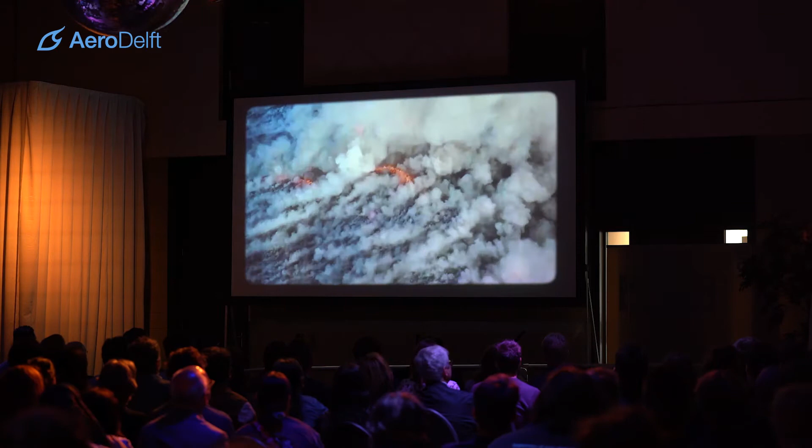Yet it also contributes to a serious problem. We're facing a man-made disaster of global scale. There is a solution.

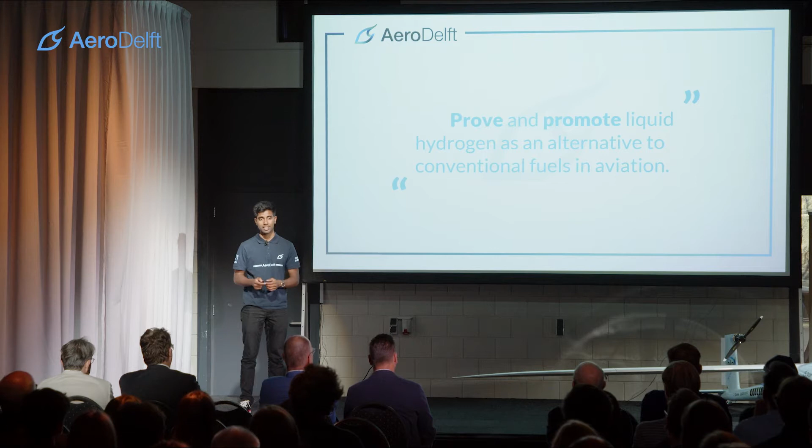We gathered here tonight to celebrate some of the biggest achievements AeroDelft has ever seen. We are closer than ever in achieving our mission to prove and promote that liquid hydrogen is an alternative to conventional fuels in aviation.

This also ties in the program of tonight, where first our Chief of Partnerships will tell you about the operation side of AeroDelft, showing how far we've come with the 'promote' part of our mission. This is followed by presentations by our engineering chiefs and technical managers who will walk you through the engineering work done this year, showing how far we've come with the 'prove' part of the mission.

But first, just like the video, let's take a step back to the very origins of AeroDelft to see what led to the inception of AeroDelft, Project Phoenix, and to where we are today.

As long as mankind existed, we have always dreamt of taking off to the skies. About 120 years ago, this dream finally became a reality. The Wright brothers achieved the first ever manned motorized flight. Let this sink in for a bit.

By pushing the boundaries of what's possible and with a true feat of engineering, we humans gained the ability to fly. This truly revolutionized transport the way we knew it.

However, as many of you also might know, there's also a darker side to this: climate change. This is an issue we cannot understate. We all know it is here, we all know it is a problem, and we all know who caused it. Us, people.

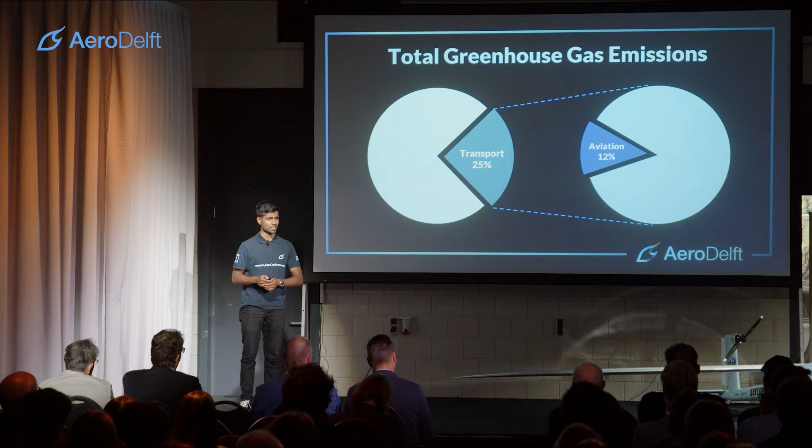Of these greenhouse gas emissions, about 25% comes from the transport sector. Of this 25%, 12% comes from aviation. I already hear you thinking, oh, that's not that much, right? Well, if you look at our next slide, you see that since 1990, the carbon footprint of the aviation industry more than doubled.

This is partly because the aviation industry almost experienced no carbon restrictions, while other sectors often had to adapt. Today, driving by car in a carbon-neutral way is a reality, while aviation seems to be lagging behind.

The aviation industry, evidently, is the quickest growing sector with a carbon footprint there is. On top of that, by 2050, the demand for aviation is expected to triple. Clearly, something has to change.

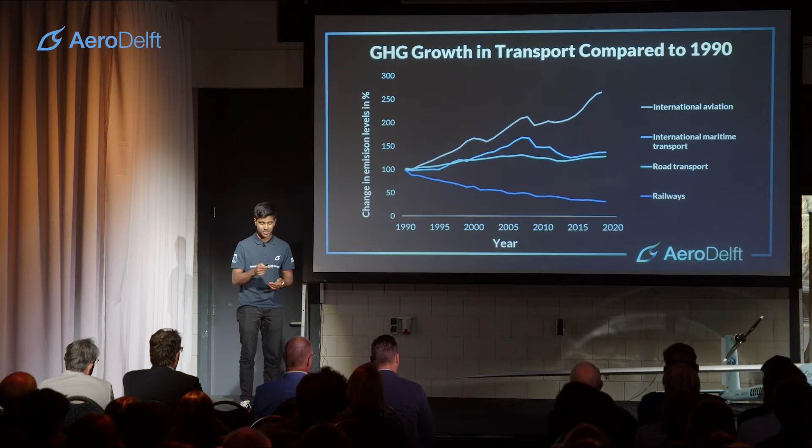Incremental evolution in the form of efficiency savings is not enough. We have to radically rethink the way we propel our aircraft. This is what led to the foundation of AeroDelft and soon after Project Phoenix, the name marking the rebirth of the aviation industry.

It was a team of 2018 who first set up this project and its mission and vision. They were also the first who focused on gliders and liquid hydrogen.

I also hear you thinking, but why hydrogen? Well, compared to kerosene, the use of hydrogen does not lead to an increase in CO2. The only byproduct is water.

Also, when we make this liquid, we can also store it in a much smaller and compact way. This makes it one of the most promising alternatives to decarbonize aviation. With this new focus on liquid hydrogen, the 2018 team really got us off the ground.

But as many of you also know, in this academic year, 19-20, was also the year the COVID-19 pandemic struck. Despite the countless challenges this brought, like working online or not even having a workshop, this team pushed through, even throughout the summer holidays, in a shed in Belgium to keep building this aircraft.

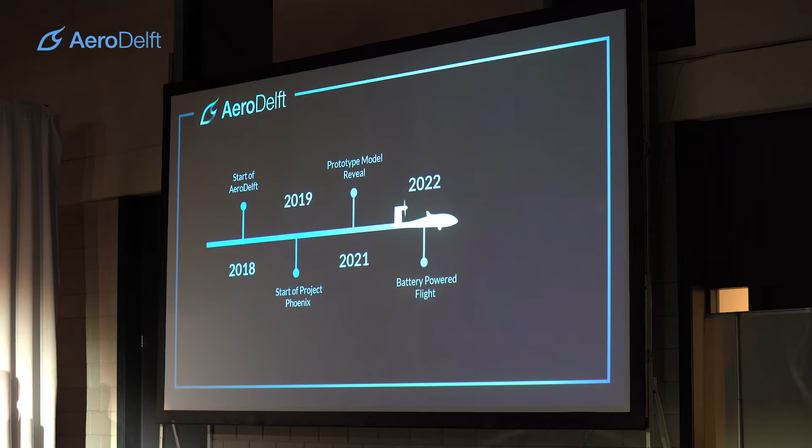AeroDelft started in 2018, and Project Phoenix started in 2019. In just 2 short years, we had our first big milestone: we managed to reveal the structure of our aircraft to the outside world. This year, we have focused on bringing the aircraft out of its construction phase and into its testing phase. In the coming years, we plan to intensify our focus on developing the hydrogen technologies that we aim to do at AeroDelft.

Our goals are reflected in the way the prototype team is structured. We have a testing team focused on building and operating the aircraft, and we have a propulsion team focused on building, designing, and testing our propulsion system so it's ready to be integrated into the aircraft and validated in the air.

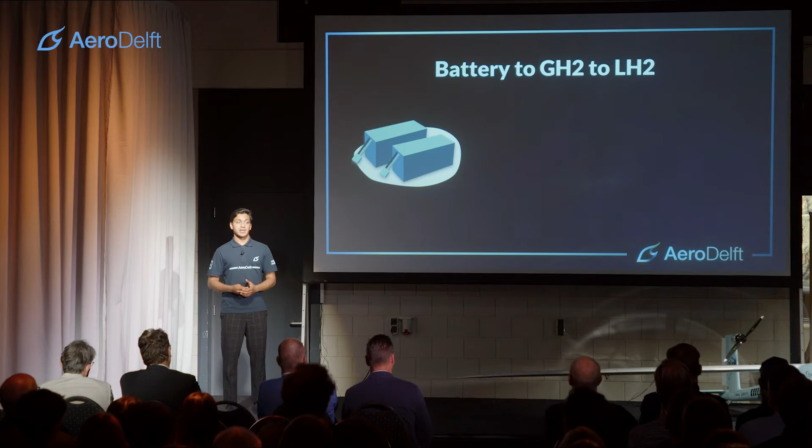However big our ambition is to decarbonize the aviation industry, we have to start small and simple. That is why the first step in the process is to fly our aircraft on battery power, to validate that the work done by the years before us has resulted in a flyable drone.

After this, we can start increasing the complexity slightly and integrating our gaseous hydrogen systems. This includes our tank, a number of pressure controllers, and a fuel cell. Then we can take the ultimate step and fulfill the goal of Project Phoenix prototype, to fly on liquid hydrogen. This step, once again, increases the complexity even further, including challenges such as cryogenic storage, temperature control and pressure control, and conditioning hydrogen to be used in an aircraft.

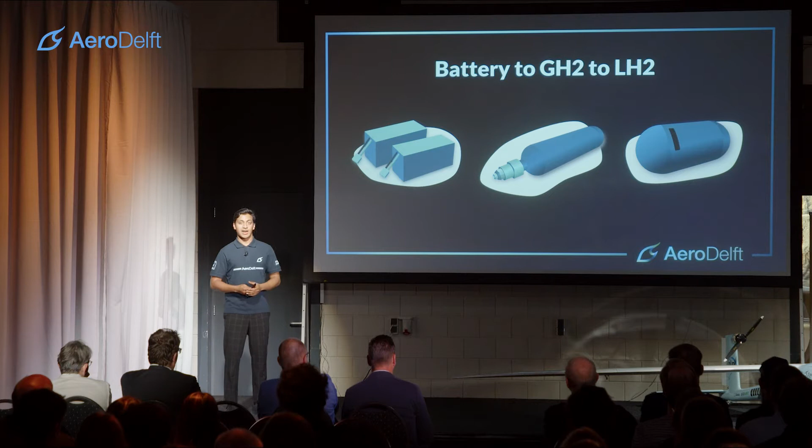So where did we start this year? Well, our first task was actually rather mundane: setting up our workshop. While doing this, we moved countless testing rigs, materials, and items, and we didn't really know what much of it was.

This is an essential part of a student team working on a multi-year project. Every year at the start, there is a very steep learning curve in which the new team understands all the work that has been done by the past team. Without transfer of knowledge, a multi-year project like AeroDelft would not be able to progress.

So, to introduce the aircraft: it is a 1:3 scale model of an E-Genius glider. It has a motor on the tail, and it's designed to be a glider to make the most of the precious hydrogen that we take with us on board. To give you an idea of its mass, it weighs about 45 kilograms.

We have an operational empty weight of about 28 kilograms, giving us 17 kilograms to integrate our propulsion technology. Lastly, in cruise, to give you an idea, it uses about 1,200 watts, which is about equivalent to 20 household light bulbs.

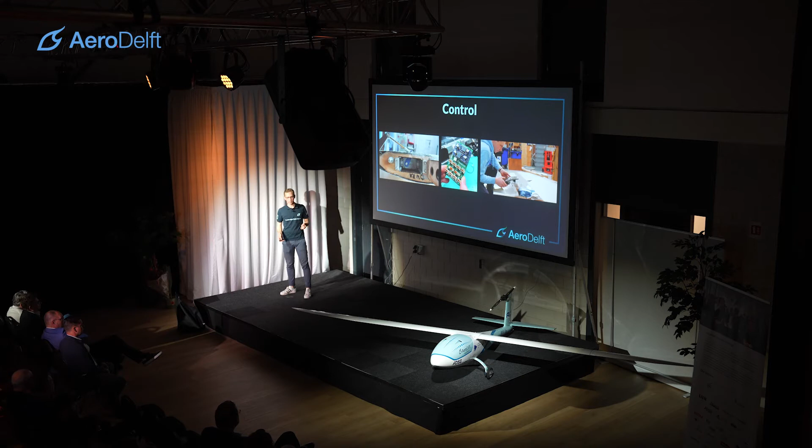So all of these developments got us to a point where we thought we would be ready for flight testing. So we got all of this progression on all these different systems behind us, and we thought we'd be ready for flight testing, and to tell you more about that, we'll get to it later in the presentation. But we first need to take a step back to see why we went all this way to get an operational aircraft.

The goal of AeroDelft is not to fly on batteries, it's not the goal to essentially develop this plane, but the goal is to prove and promote liquid hydrogen as an alternative to conventional fuels in aviation. So in parallel to the work we've been doing at prototype testing, the prototype propulsion department has worked on all the hydrogen systems that we aim to fly on this aircraft in the future. And to tell you more about these systems, I'd like to invite our Chief Propulsion Engineer, Marnix Klein, onto the stage.

Thank you, Gerben. So, fuel cell technology seems rather simple, right? To get from hydrogen to electricity. But the opposite is true. It's actually a rather new technology, let alone in a plane, because how could we actually make it fly with it? Well, that's why we have to step back a little bit. First, use gaseous hydrogen, because it's an off-the-shelf system. And then we can move on to liquid hydrogen.

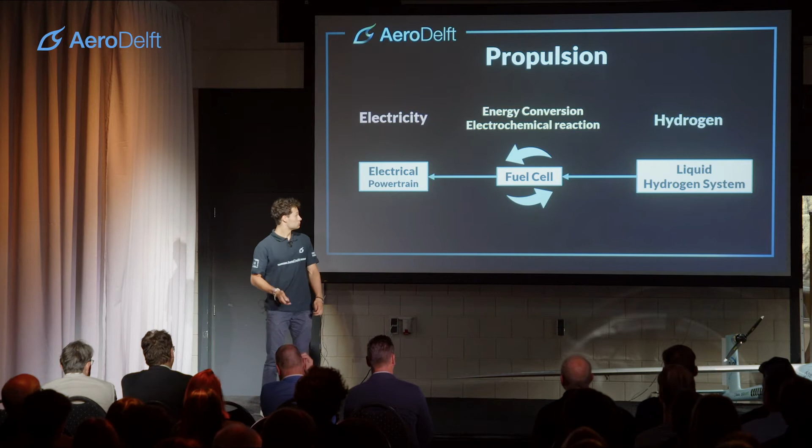But why? Well, have a look at the liquid hydrogen system first. So our liquid hydrogen system seems quite difficult, doesn't it? Because it is, actually.

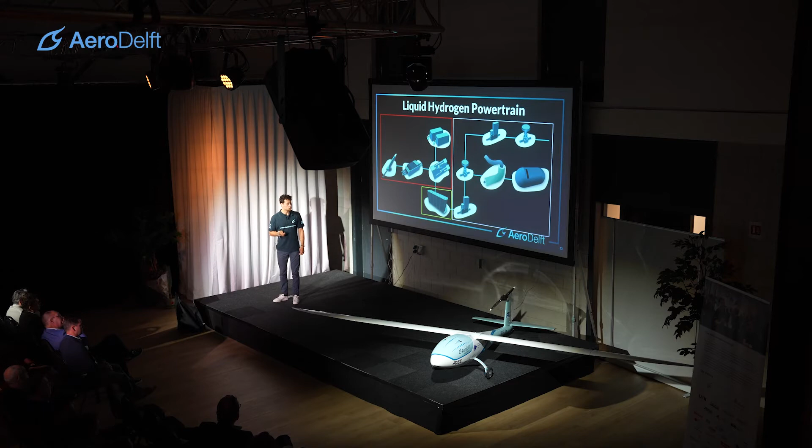Basically, we need to store liquid hydrogen. How do we store it? We need to store it at minus 253 degrees Celsius, which is really low, and it wants to heat up. So we have to keep it that low. But then again, we also need to control it to a usable temperature for our fuel cell.

We want to use it, we want to get the right temperature for it. And then at last, we also need the right pressure for the fuel cell, because it wants to operate in an optimal condition. That's why we first want to step back and use gaseous hydrogen first, an off-the-shelf system using only pressure control, as straightforward as it gets.

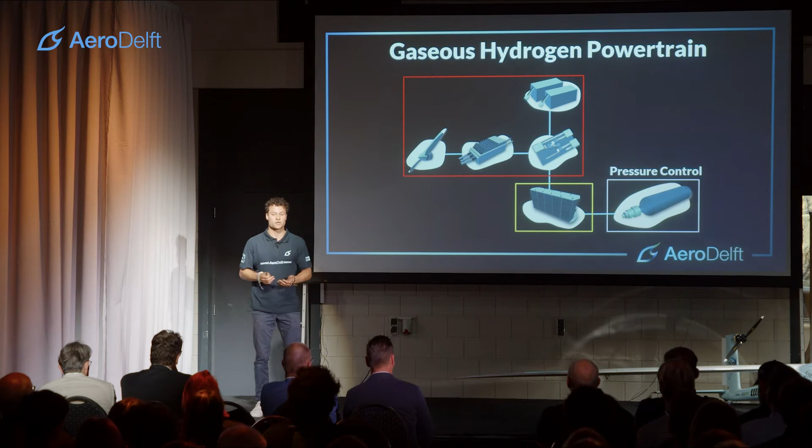So let's look at this gaseous hydrogen propulsion system first. Let's see what we did this year with the propulsion team and prototype. Let's look at the fuel cell. There are actually three main things that we focused on this year to get into flying.

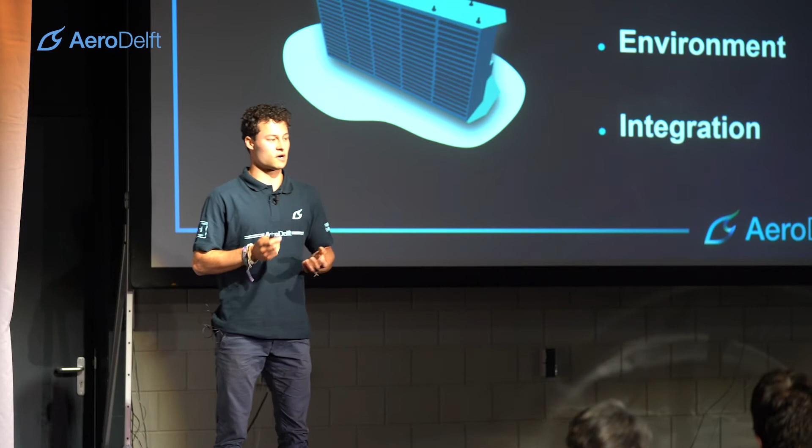The first one is to actually meet the power requirements for the flight. We want to be able to turn, we want to be able to climb, and we don't want it to fail during flight. The second one is the environment, because our fuel cell is an air-cooled system. Apart from electricity, it also produces heat, so we have to cool our fuel cell and have our environment ready for that. That's quite hard in an airplane, because we have a quite small space. And at last, we need to be able to integrate it in the aircraft, with the electronics that already exist.

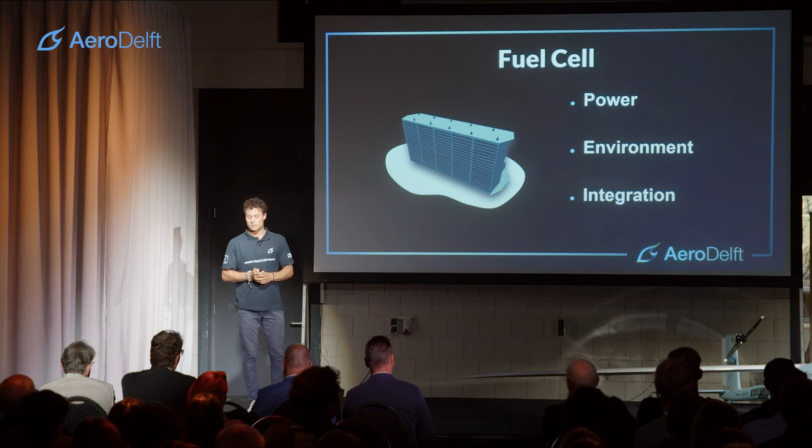So let's have a look at power first. We have our electrical setup: propeller, electronic speed controller, motor. Those need to be compatible with our fuel cell, and we can only do so by testing. We've done numerous tests with this, and we achieved a suitable system for this. That means we know we can climb in the aircraft, and we know we can make a turn in the aircraft.

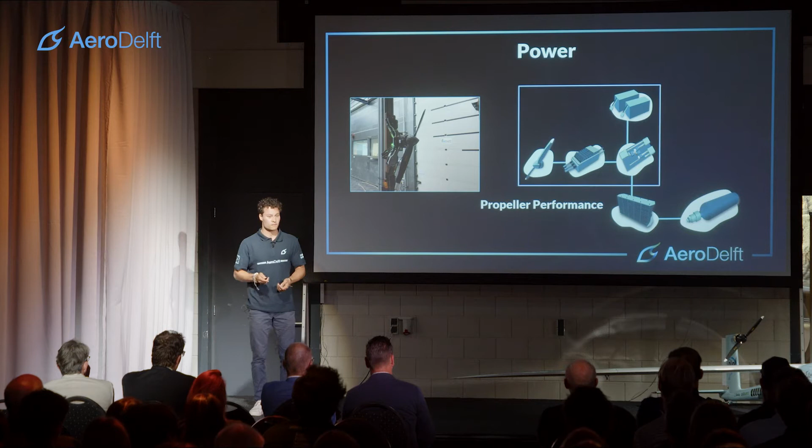The second point was environment, which is tricky because of the tight space in the aircraft that limits us. We need to find a way to cool our fuel cell, because if it heats up, it doesn't perform well anymore and might overheat. Think of a marathon runner: you don't want to overheat when you run a marathon. It's the same for the fuel cell.

That's why we designed cooling ducts for the system, to direct the airflow into the fuel cell while flying. And as a prototype department, we had to test it as well, using our very own test setup. Very professional.

We found that we could actually make sure that this works. But since we go to the extremes with testing, we got one setback: our fuel cell started leaking. So we did qualitative leak tests on it, and noticed small leakages all over.

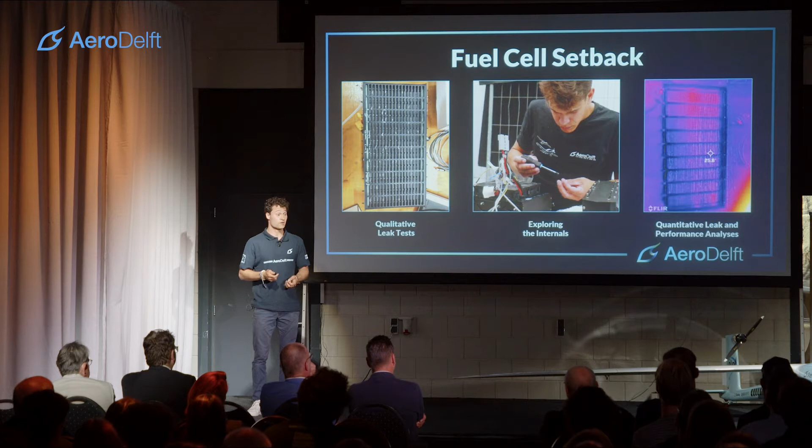But as students, we won't be set back by this. So we started exploring its internals, learning from it, and seeing if we could still use it and integrate it into our system. Eventually, after quantitative tests as well, we found that the performance of the fuel cell was still really good, that we could still use it in our aircraft, and that it was ready for integration.

And that's when one thing is left: integration. Getting it actually into the aircraft, making sure the aircraft can perform well with all the electronics inside as well. That's why I'd like to invite Gerben on stage to talk about this.

As you can see, there has been a lot of work in both departments. But now it's finally time to marry the two departments together to perform our first ever full powertrain test. I'm going to take you through the steps we took to build up to that test at the end of our year, and show you the results.

The challenge we face in merging the hydrogen system with our operational aircraft is power. Our fuel cell can provide 1.5 kilowatts, which is enough to keep us in the air, but not nearly close enough to get us off the ground in the first place. So we need to provide extra power, more than the fuel cell can deliver, and for that we use batteries.

Now we need to make these two power sources work together properly. Over the last few years in AeroDelft, a system was in development named PowerPath. It essentially formed a switch between battery power and fuel cell power, so it would either run on the batteries or on the fuel cell. What we realized this year, after facing many problems with this component, is that there is an easier way to achieve the same goal.

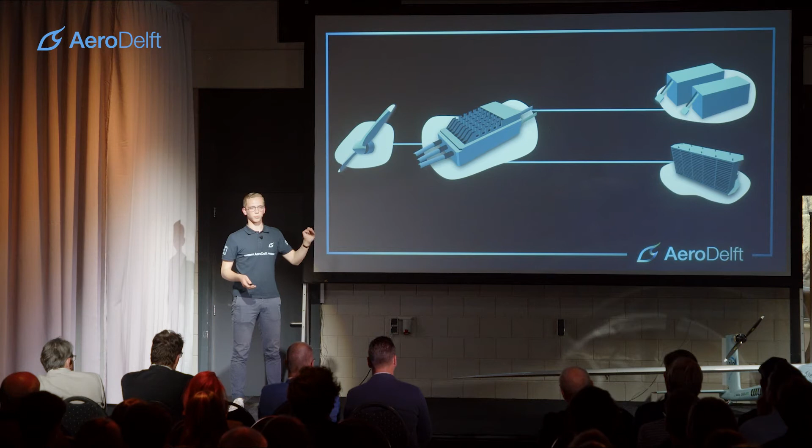The realization came that you can place the battery stack and the fuel cell in parallel. This way, you can run on both systems simultaneously without issues. However, this causes most of the power to be pulled from the batteries during takeoff and cruise, so you're not taking full advantage of all the precious hydrogen on board. So the only thing we need is a simple switch on the battery line, to switch the batteries off and fully fly on the fuel cell.

This is an integral part necessary for our full powertrain test. But to get to this point, we had to come a long way, because I'm not an electrical engineer, I'm an aerospace engineer. I like electronics, but I didn't have a clue about them, nor did the rest of our team. So we went through iterative design cycles where we learned step by step how to make these components, how to produce them, and how to test them. We went from design to an integrated design to an even further developed design, and in the end we had a component ready for the full powertrain test.

Now, the full powertrain test is meant to simulate what happens in the aircraft. On the ground, it's easy to control all these systems by hand. You can monitor and control everything well, but eventually we'll need to integrate this into the aircraft, so the system has to be somewhat autonomous. In parallel to the development of the Lightning Line, we worked on control systems to make sure switching and fuel cell control can all be done remotely.

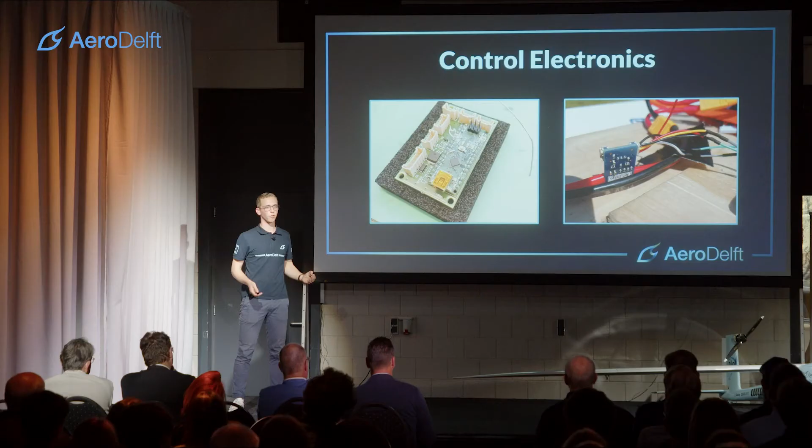So all this work from propulsion and prototype testing culminated in this one day at NLR in Marknesse, where we aimed to test our full powertrain. This would be the first time AeroDelft ran a hybrid powertrain capable of flying an aircraft, so the stakes were high. Scorching heat, beaming sun, lots of pollen in the air - it was a harsh day, but we set up our full powertrain test and aimed to do a full simulation of a flight profile.

With all systems ready and checked, we turned on the propeller to simulate takeoff. This is high power, high speeds, lots of wind going through your face. You can see the propeller spin up to takeoff speeds and hear the loud noises. It's quite a hectic environment when you're there.

After this takeoff, after the system has really been stretched, we get time to do some checks while the vehicle is simulated to be in cruise phase. We see that all our components are still performing normally, so we continue on with testing our full powertrain.

To give our pilots some space in the air, we performed four missed landing attempts, which are very stressful for all the components because you have to power through the runway and gain altitude once again. After these four attempts, stressing the system to its absolute limits, we still saw all the systems performing nominally - which just means it's all good.

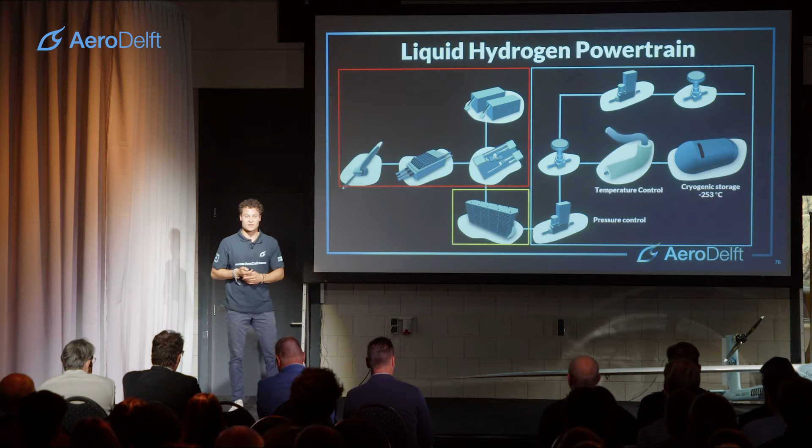First off, our cryogenic storage tank. You can probably hardly imagine how you sustain minus 253 degrees Celsius of hydrogen - we do this with a double-walled tank with vacuum insulation in between. This is our own designed tank, and this year we've been able to manufacture and certify this production. The next steps are to leak test it, which will be taken on by next year's team. After those leak tests, we'll be able to cryogenically test it, assemble it, integrate it further into our aircraft, and actually fly with it.

Speaking of that integration, I'm coming on to our next component: temperature control. How are we going to get this liquid hydrogen to become gaseous and suitable for our fuel cell? There's one simple solution - the heat exchanger. We use heating tapes, active heating, and insulation around it to heat it up above 0 degrees. Of course we have to test it as a prototype department, as I mentioned before. We tested the connections in the heat exchanger first, and eventually that led us to the first ever cryogenic and functioning heat exchanger that we have at AeroDelft.

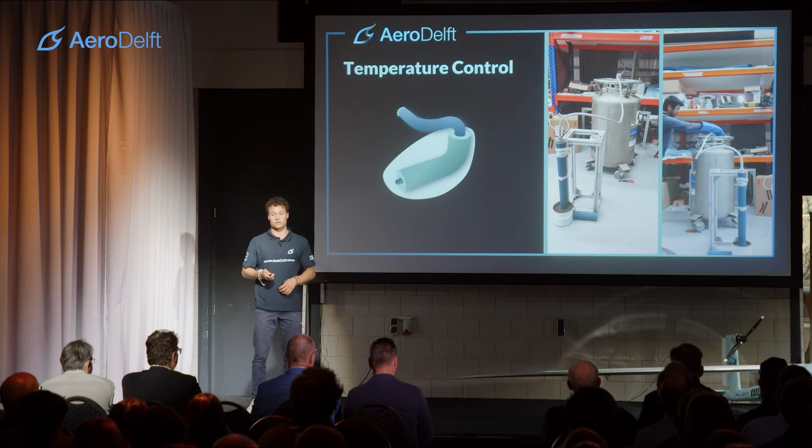So we actually made a proof of concept of this method. Yes, the video works.

As you can see here, we have liquid nitrogen tested in our heat exchanger with gaseous nitrogen coming out. This is a really nice, big achievement for us because it's something we couldn't grasp before. Now we've actually done cryogenic testing, so we know for sure our system is going to work. It just takes a lot of testing, and a lot of brains being shattered.

The last component is the pressure control system. Basically, we need to have a suitable pressure for the fuel cell, and apart from this, overpressurization has to be prevented, so we have to build a safety line into that as well.

This year we actually successfully assembled our pressure control system, and now it's ready for integration with our heat exchanger that I mentioned before, and also with our eventual cryogenic storage tank.

But nothing of this is actually really relevant if we cannot fly our aircraft. So that's why I'd like to invite Aman back on stage to talk about this flight testing campaign that we are so excited to hear about.

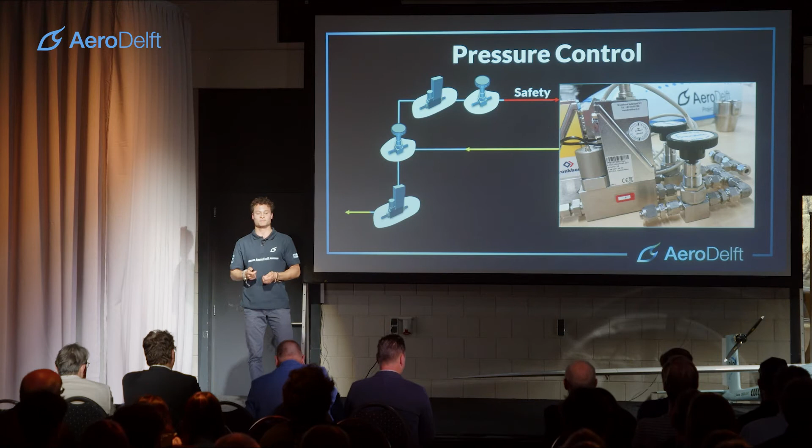There's not much point in having a fully tested, ready-to-integrate hydrogen propulsion system if you don't have an operational aircraft.

Our testing campaign spanned about 2 months and consisted of about 15 days in Marknesse in total. See it as a bit of a Sherlock Holmes mystery: during our testing, we were trying to identify and debug the issues in our aircraft that we found on the ground. We didn't have to find one, not two, not three, but 4 culprits in the end.

So what did we have to improve? This can be broken down into the brakes, the firmware, the rudder, and the tail gear.

In our first few days of testing, the taxiing was pretty rocky. As you'll see on the video I'm about to show, at just 6 meters per second, our aircraft would dart off in one direction as a result of the brakes being imbalanced.

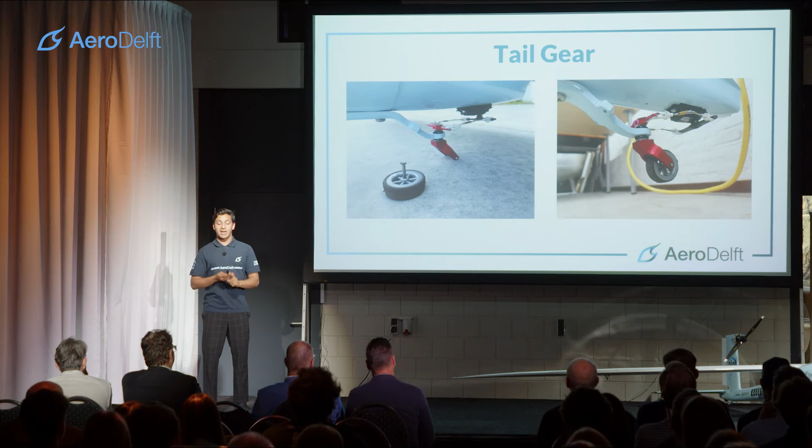It was pretty difficult to integrate, seeing as there's a lot of fiddly electronics, a lot of fiddly structure things that you have to get into. However, in the next video, you'll see it got us taxiing much, much more controlled. This gave us a massive boost as a team.

However, it was a bit bittersweet. At this point, after 13 days of testing, we heard that we only had 2 days of testing left. So we really were under pressure now as we headed off to our last 2 days in Marknesse. However, luckily, diamonds are created under pressure. And now it is my pleasure to share our first flight attempt.

Rudder, check. Ailerons, all good.

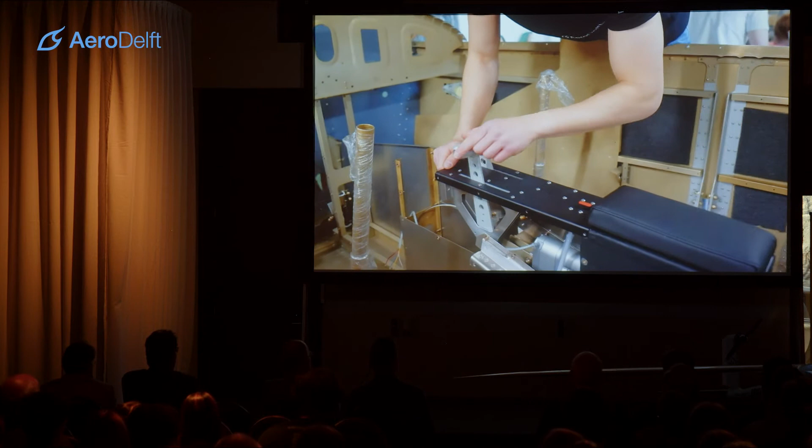Phoenix Prototype serves as a testbed for the novel propulsion technology we are developing together with our partners. The knowledge that we gain from conducting experiments will be crucial for our bigger, full-scale project that is also in the works. Today we are at the NLR in Marknesse to perform our maiden flight. You can tell that everyone here is a little bit nervous, but we're confident that it'll be a successful flight.

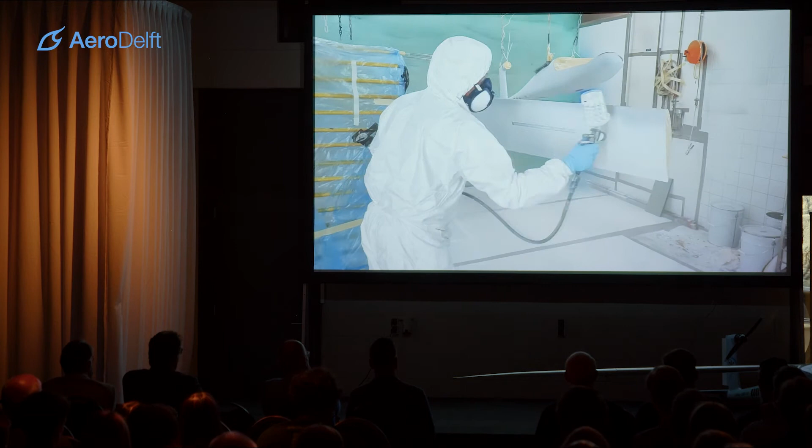Our prototype aircraft has been in the making for over 2 years now. And as we started as a new team this year, we really tried to understand what the previous teams had already accomplished. We started by testing the subsystems of our aircraft, namely the brakes, making sure that we can brake properly on the runway. Also the control surfaces, making sure that we have reliable control in our flight.

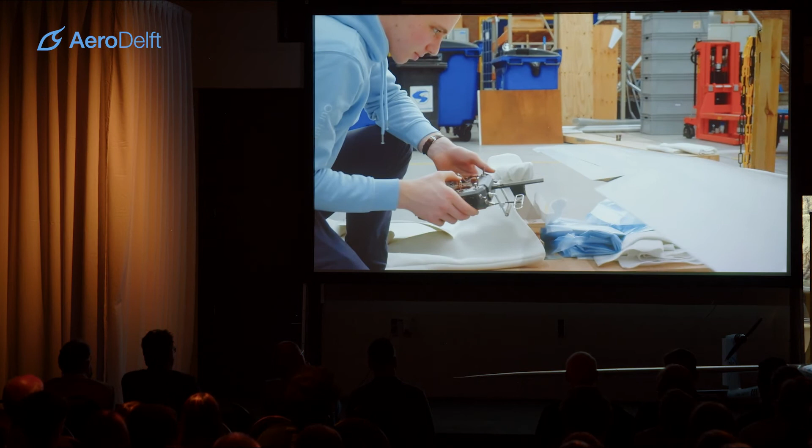Bringing this all together here at NLR for these final testing days is very exciting. We are confident heading towards our first flight, and we're sure that it will be very successful.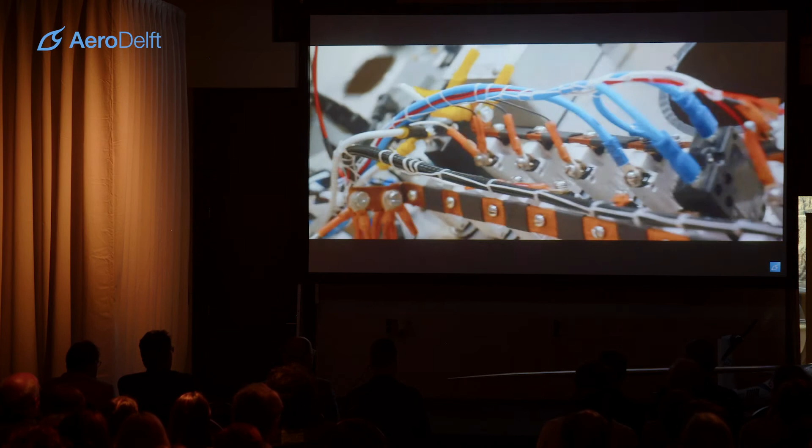All right, full scale. So now that we got the prototype flying, we basically got the perfect testbed to get comfortable with all our different hydrogen systems and also to get comfortable with hydrogen in a relatively safe environment. However, if we really want to prove that you can fly on hydrogen, we also need to fly with people on board. And that is why in 2020 the decision was made to start with the full-scale project.

If I put it very simply, then the goal of the full-scale project is to transform a standard Sling-4 aircraft into a hydrogen electric variant. Once you complete the project, we'll be able to fly with 2 people on board for around 4 hours without any carbon emissions. But of course, before we get there, first a lot of steps need to be taken.

So like I said, we started in 2020, in the academic year before us. And during this year, really the foundation for the project was made. So most of the big components were selected, the sling was ordered, and also a preliminary design was made for most of the big components that needed to be designed.

Therefore, when we got handed over the project in the summer of 2021, we really had a solid foundation for all the components that need to be designed. It was really sort of our responsibility to transform the full-scale project from something that was a design on paper to an actual physical object. Our goal for this year was to get the project out of the design phase, build the sling, and finish the electric part of the powertrain.

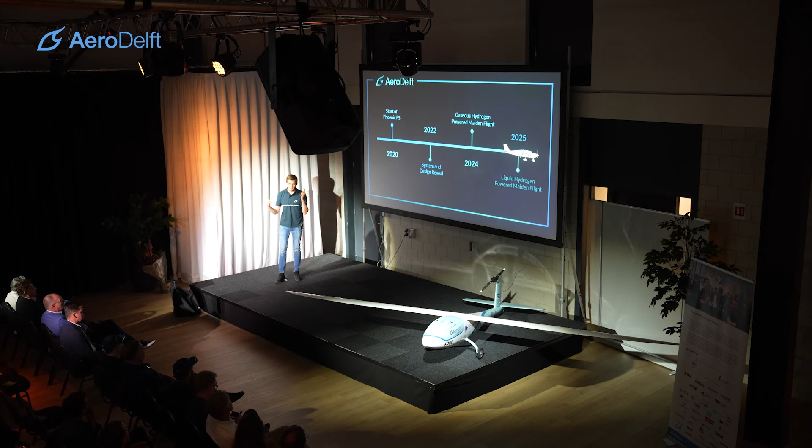But of course, before we can get there, we first need to do our part. To do this, we've divided ourselves this year into 4 different departments: propulsion, electronics and control, certification and testing, and structures. Each department has its own sub-projects, sub-goals, and timelines. To explain this in more detail, I would like to hand over to the department chiefs, starting with our chief of propulsion, Joey Herbold.

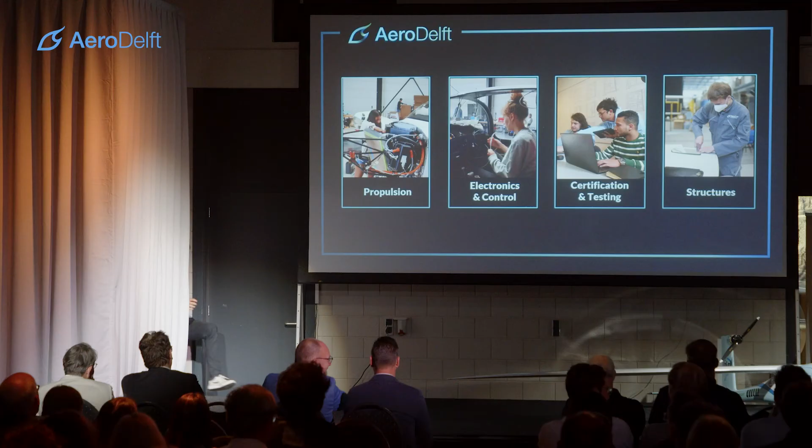Thank you, Rolf, for the great introduction. I'm the Chief of Propulsion for the full-scale project. I want to take you over everything we learned in one year about our propulsion system, but today I only have around 10 minutes, so I want to give a bit of structure to the story. I want to take you back to what a fuel cell does, the core of what we do: it takes oxygen and hydrogen into the fuel cell and converts it to electrical energy. This is the essence, and this is also what I will be talking about.

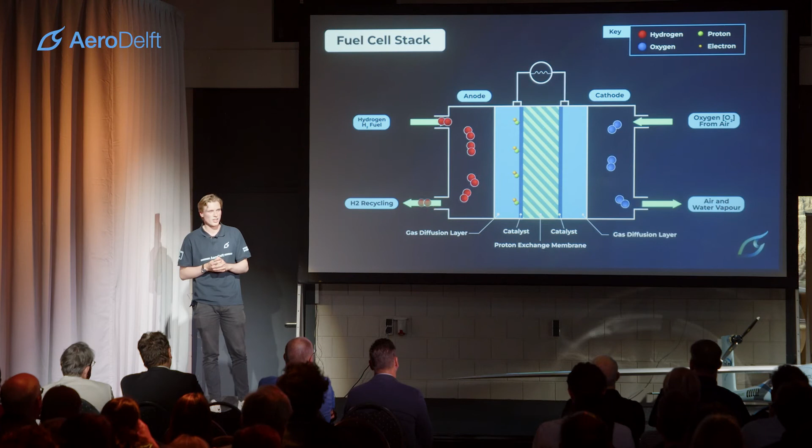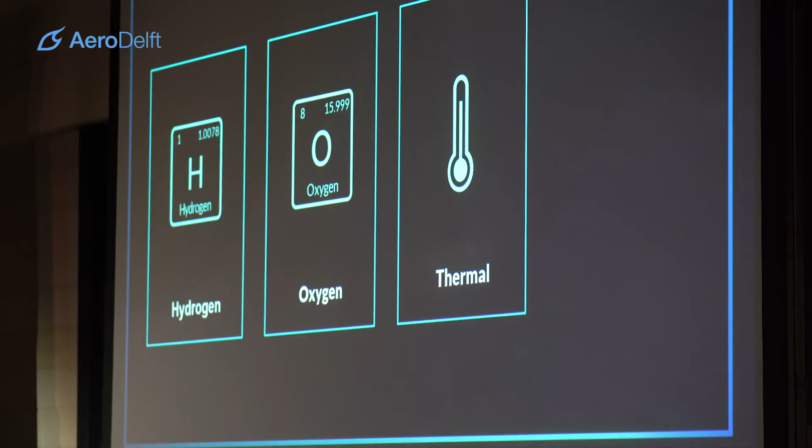There are a few subsystems to keep our fuel cell happy: the oxygen supply, the hydrogen supply, the electrical supply, the electrical load, and in any process there is a thermodynamic efficiency, so heat is also generated. We don't want overheating, so we also have a thermal management system. These are the subsystems we have, and I want to show one more slide to sum it up: hydrogen, oxygen, thermal management, and electrical load.

Let's dive into the hydrogen part of what we designed this year. I want to go over 4 parts of this system, starting with the supply, from tank to fuel cell. In the aircraft, it will go from the tank to the fuel cell in the following route.

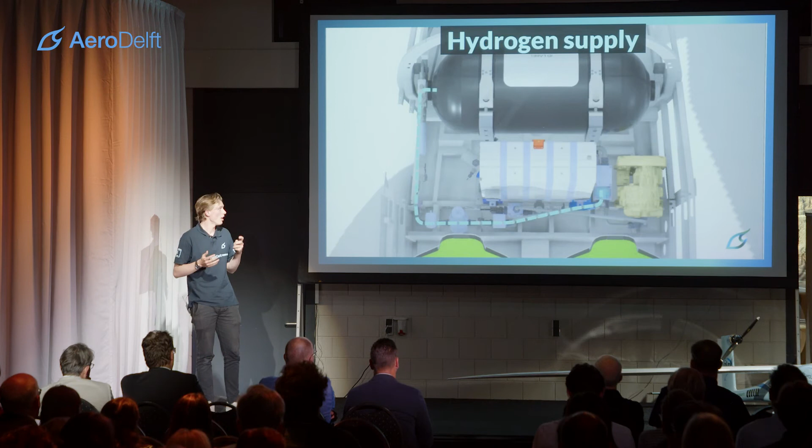But it's not as simple as just a supply. We have also designed a recirculation in order to improve efficiency. Not all the hydrogen is used in the system, and we want to use the leftover hydrogen as well. So the recirculation comes out of the outlet of the fuel cell, gets recirculated through a pump, and back into the inlet of the fuel cell.

This is how we supply everything, but we also need to take into account safety, especially when we will take passengers on board. For safety, one of the biggest risks is overpressurization—kaboom, let's put it like that. So to prevent that, we have an overpressurization venting line on the tank and on the pipelines themselves.

It will take a route like this: it will go to the back of the aircraft and be vented out safely behind the aircraft. We have performed CFD analysis on the vent line and even took into account risks like combustion of the hydrogen when it leaves the aircraft. We want to verify that none of the structural components or control elements of the aircraft are affected by such a potential flame.

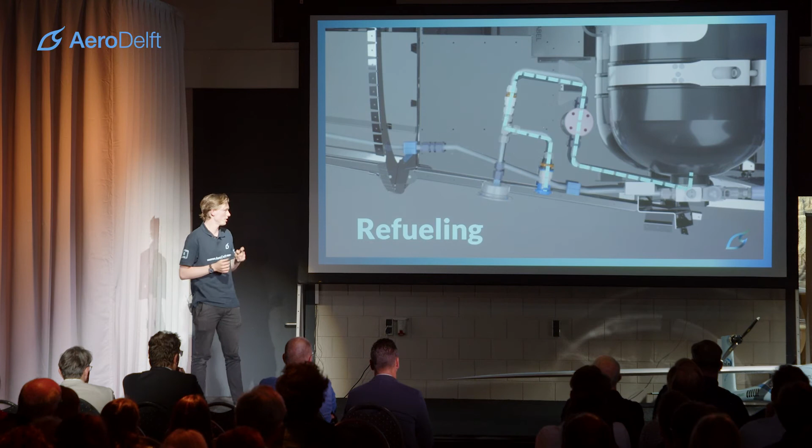So then the counterpart in this whole reaction: oxygen. Imagine that you are a particle of oxygen. You will enter the aircraft through an air duct on the side. We have guided airflow through a channel in the skin, which will take you to the piping system for the cathode side, the oxygen side.

The oxygen is conditioned to proper standards, just like the hydrogen. It is filtered, compressed, cooled, humidified, and gets exhausted down through the aircraft. And of course, as already mentioned, you will get water, H2O. Please don't drink it, it's not good for you, because there are no minerals in it.

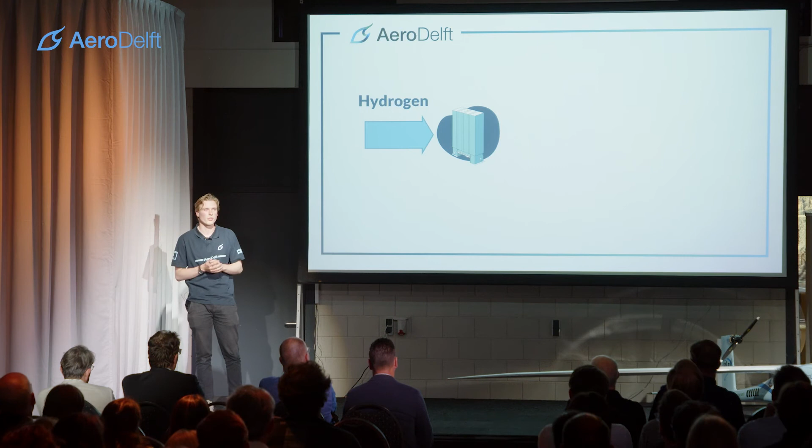That is it for oxygen, but the thermal — I think this has been the most problematic subsystem in our design. Thermal management for fuel cells is a really hard topic, and that has mainly to do with the efficiency of a fuel cell. It's around 50%, which means that for a certain amount of energy from the hydrogen, around half of this will be produced into heat.

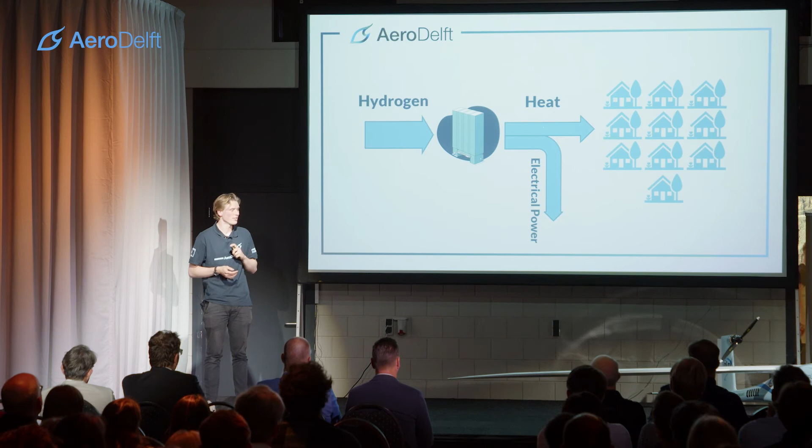For our system and our aircraft, this boils down to around 100 kilowatts of heat. And to put that into perspective and make an analogy to houses like Aman did, that's around 10 households of heating.

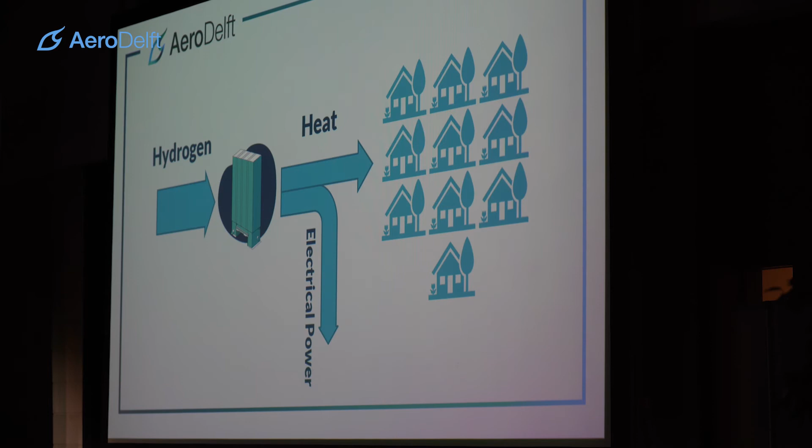It's really a lot. And our solution to this problem, and it just fits, is a very big radiator. It takes around the entire surface area of the nose, and this really has been a struggle, but we made it work like this.

We chose a very big radiator as opposed to smaller radiators in different cooling loops because we have limited space, and the extra piping that you would need would overcomplicate the nose.

But combining everything comes with a few problems. You have components at 50 degrees, and you have components at 80 degrees. Of course, that will not really match if you combine that, because either one component is too low of a temperature, which would affect the efficiency of the component, or it would be too high and it would overheat.

So to solve this — of course it's all in the same loop — but to solve the issue of the 80 degrees, we have implemented a recirculation, which takes hot coolant from the fuel cell and reroutes it to the cold coolant coming in from the radiator, thus mixing it to a higher temperature, which would suit the fuel cell as opposed to the compressor or any of the other parts.

That's a little bit about the thermal. Please ask any questions you want because I don't have a lot of time.

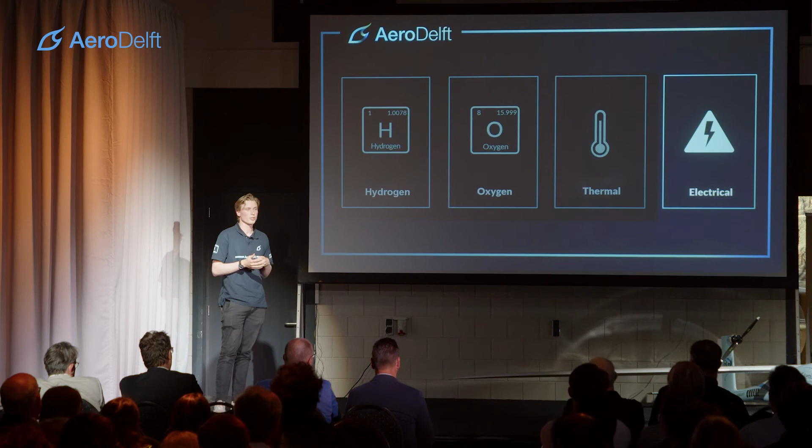The electrical part is the last part. This is what drives the aircraft in the end. The fuel cell will power an electromotor with a propeller, as well as the compressor we mentioned before. So a bit like this.

There is an issue here though. The compressor was used to give a supply of oxygen to the fuel cell, and the fuel cell gives a supply of electricity to the compressor. So you run into an issue, a circle of non-starting.

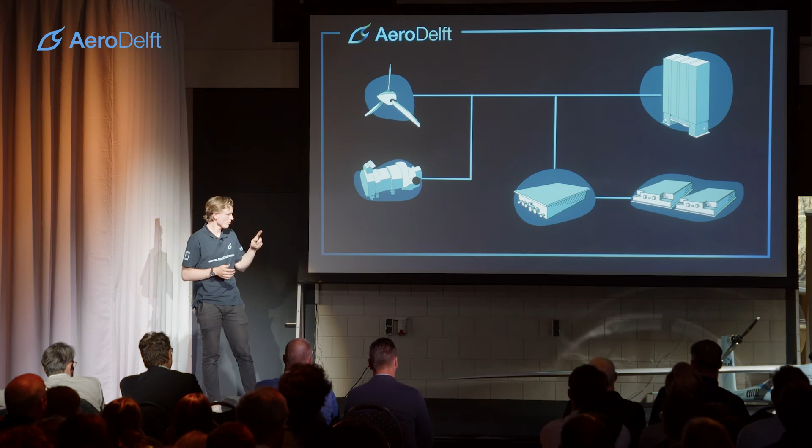So we need to break this, and therefore we also have batteries on board. We have a battery pack and a voltage booster to bring it to the same level as the fuel cell. This will start our system and allow the operation cycle to start.

We have worked with the electrical parts, so not the hydrogen, not the compressor, but the propeller, the batteries, and the voltage booster. And we've gotten the hang of it, I will say.

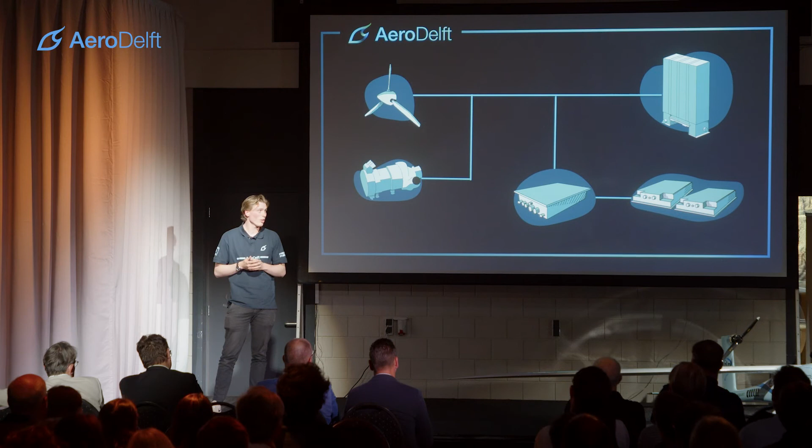We worked a lot on the test bench, and we also started integrating this into the aircraft. And this really has been a valuable experience, working with our hands, where the first 9 months of the year were spent on the computer, basically.

We had a lot of fun. We built a very strong bond, I would say. I cannot thank the people I have worked with enough. And this is not solely a mission done by the propulsion department, but also the electronics department helped out a lot with the control of the system and with all the low voltage cabling.

And to explain more about this part, I want to give the word to Romy Haring, the Chief Electronics of the full-scale project.

As Joey has just shown, we have a fully working powertrain. However, we cannot safely fly an aircraft with only a powertrain. We also need to be able to monitor the aircraft to see what's happening. We also need to control the aircraft, and we need to distribute the power evenly. Well, that's where we, the electronics and control departments, come in. We actually started out as quite an inexperienced department, but with sheer enthusiasm and determination, we managed to create something to be proud of.

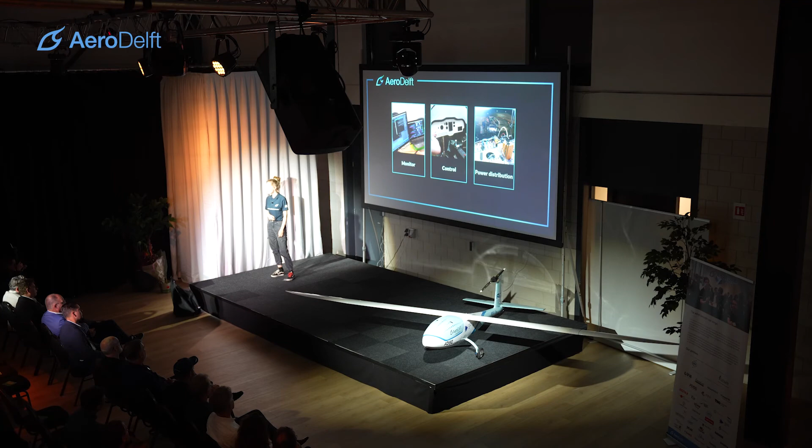So let's have a look at our first task, monitoring. As you can probably imagine, we try to design everything to work perfectly. But just in case something does go wrong, we want the pilot to be able to react immediately. For that, we want to have a monitoring display that shows all the most important values of the most important components.

You cannot simply buy a monitoring display for an aircraft that doesn't exist yet, so we tried to develop our own system. In the beginning, it had quite a lot of bugs, a bit like this clicker: sometimes it works and sometimes it doesn't, but figuring out why it doesn't work is actually quite a hassle. But in the end, we did manage to create something.

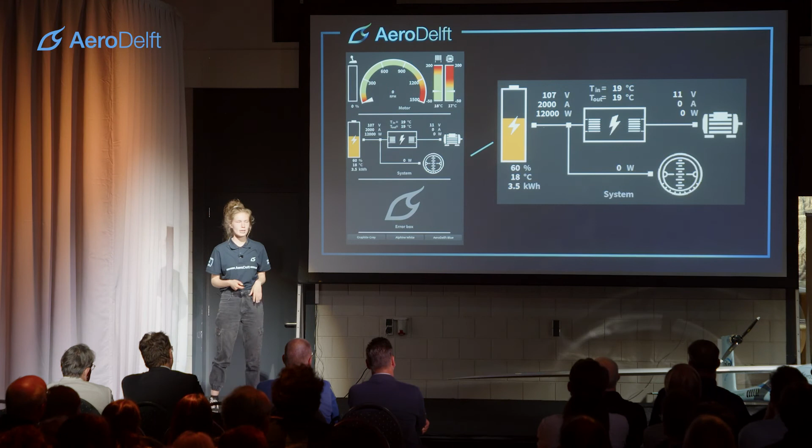So this is our monitoring display. At the top, you see the values of the motor, for example the rotations per minute and the temperature. In the middle, you see a schematic overview of our system during taxi, so we've got a battery, the voltage booster, the motor, and the avionics below it, showing values like power and temperature. At the bottom, we've got our error box, so if something goes wrong, our pilot knows exactly what's happening within the aircraft.

But how does this look in the aircraft? When we get our propeller spinning, we see our rotations per minute going up, and also our temperature goes up slightly. But because everything is in the green, our pilot has nothing to worry about. But still, with only a monitoring display, we still cannot fly.

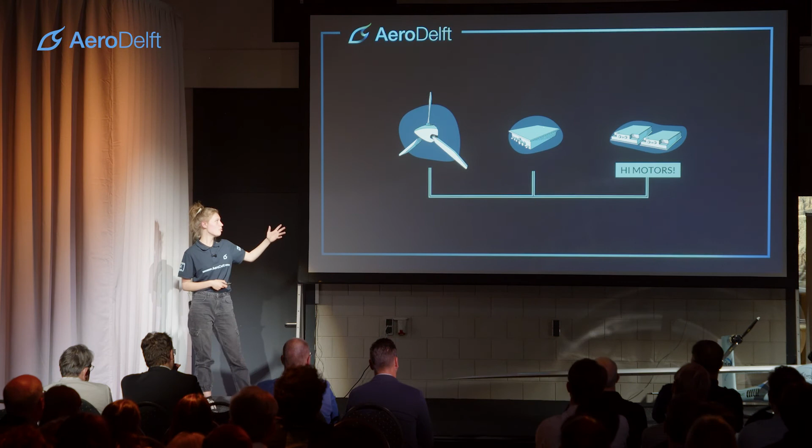The monitoring display gets its information via CAN, a certain way of messaging. It sounds complicated, but it's actually quite simple. Basically, our motor sends out a message, say, 'Hi, batteries.' This message is only meant for the batteries, so only the batteries will reply with, let's say, 'Hi, motor.' In a similar manner, our monitoring display gets its information from the power components.

So let's have a look at our second task: control.

It houses all the important connectors and board computers that are easily accessible for engineers to make some last-minute tweaks. There are a lot of components on the dashboard, but believe me when I say there are even more components behind it to get it all working.

Installing them was quite a hassle. We tried to test and install as many components as possible before putting them into the aircraft, to get some familiarity with the system, but also because there's limited space inside the aircraft, and we've got a lot of components, a lot of departments, and a lot of people wanting to work on the thing at the same time.

That led to a lot of cables, all with their own function and a tendency to get tangled. I especially remember one Saturday working with Nanami, where we basically found out that our arms are always too short and our bodies too inflexible to reach all the places we needed to reach. We went home that day with sore backs, but the looks on our faces after our first successful small test were priceless and definitely worth it.

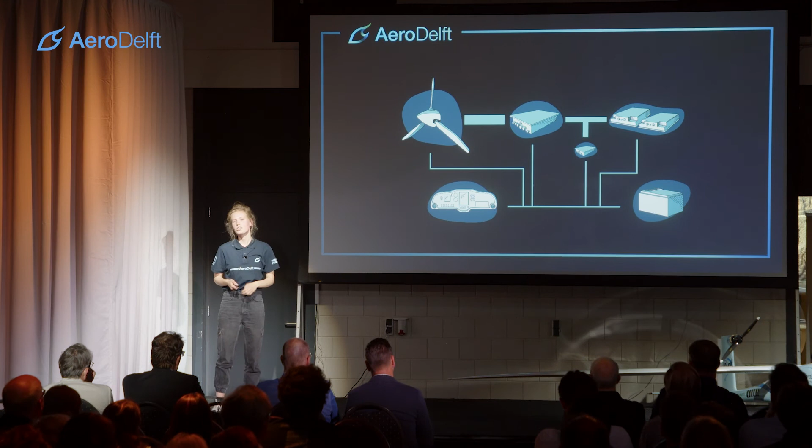We tap off a little bit of power and boost it down to recharge our low voltage battery, so that our low voltage battery can remain small. That were basically our tasks: to monitor, to control, and to distribute the power well.

But let's have a look now at a department that's often overlooked, but just as important, namely showing the authorities that what we're doing is well, and that our aircraft is safe to fly. For that, I'd like to give the floor to Vlad, our certification officer.

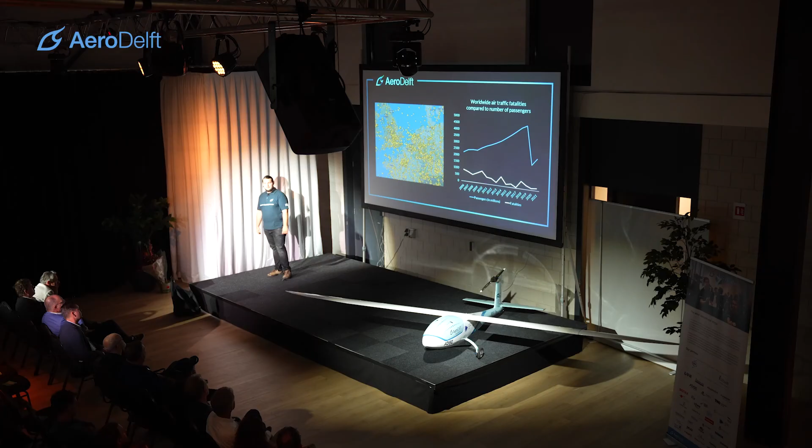Now I'd like to talk about certification, why it's needed, and how we can go about achieving it. On average, there are around 10,000 planes carrying more than one person in the air at any given time. Despite this, aviation is by far the safest means of transportation out there. This can only be achieved through the strict rules and regulations every plane needs to adhere to. This is where certification comes in, identifying possible risks and establishing mitigating measures to prevent them.

In our case, we are taking a Sling 4 aircraft and converting it to hydrogen propulsion. As we are trying to fly in the Netherlands, part of the European Union, we need to certify with the European Aviation Safety Agency, or EASA. As we are building a single airframe, which will be very closely monitored, whose only purpose is to prove flight on liquid hydrogen is possible, we claim our aircraft is experimental. This means we won't have to deal directly with EASA, who are very strict and constantly occupied. Instead we will have to justify our aircraft's safety to the Dutch civil aviation authorities, the ILT.

The Dutch government is currently working on an experimental aviation law, which will make the entire certification process much easier. But currently that law is still not yet developed, so in the meantime the authorities will tell us to follow the EASA certifications. This is the certification specification for normal category airplanes, CS23. While we still have to adhere to EASA regulations, the Dutch authorities are willing to work with us and help us achieve flight more easily. They are willing to reduce some of the requirements placed on us, especially with regards to service life. So how do we go about achieving certification?

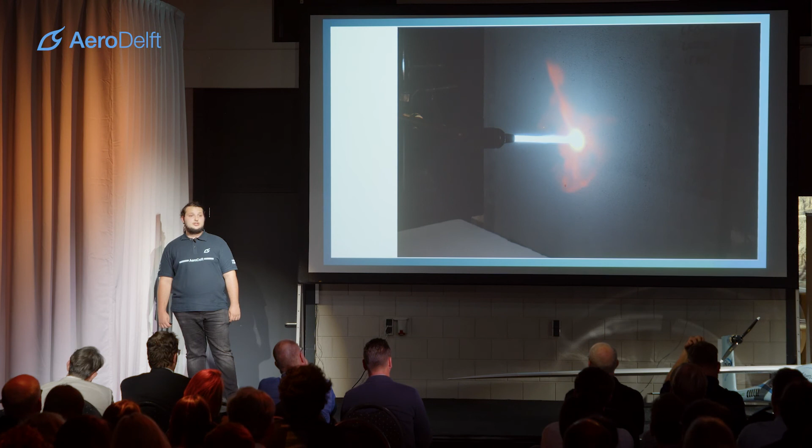But that is not enough to justify safety. We need to prove that these failures won't come to be, which requires testing. Testing is the only reliable way to figure out how everything in the aircraft will actually work out, because no matter how smart the engineers designing the systems are, nothing will work out quite as expected, quite as in their calculations or even in their simulations. Testing serves as the main means of justifying safety, as it will identify all failure scenarios, their causes and effects.

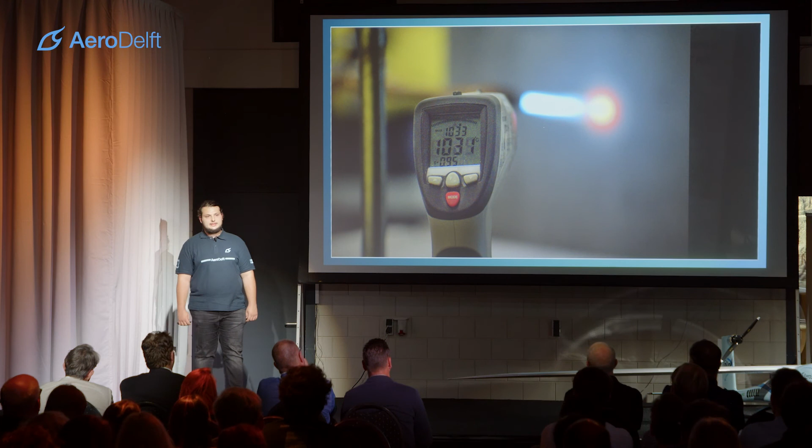And of course, we would have nothing to do, nothing to test, without the work put in by the amazing structures department. So let's hear all about it from Tetsuo.

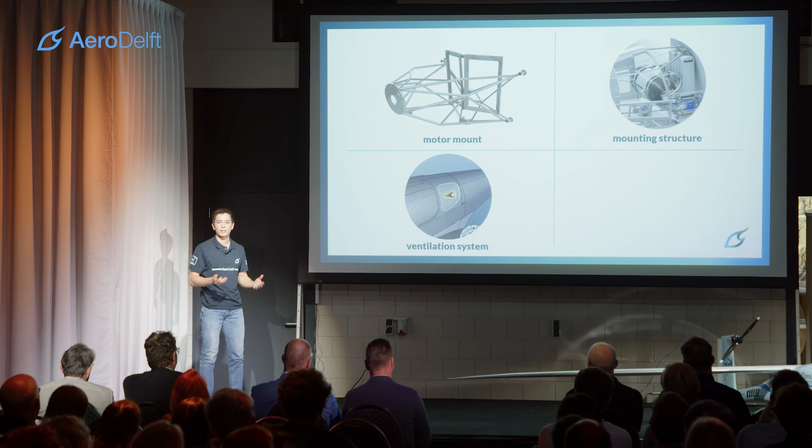First, a custom motor mount to support our electric motor and batteries. Second, a mounting structure to attach our hydrogen system to the airframe. Third, a ventilation system to circulate air around hydrogen-carrying components to prevent buildup of hydrogen in the event of a leak. And last, a firewall to protect the passengers in case of a hydrogen fire, and to act as a wall on which we can attach components such as an air filter.

I could spend hours talking about the engineering work that went into all four subsystems, but due to limited time, I will only dive deeper into the design process of our custom motor mount. This way, I want to give some insight into how we handle complex engineering problems like these, and show you how we design our customized parts such that they are safe to use in our aircraft.

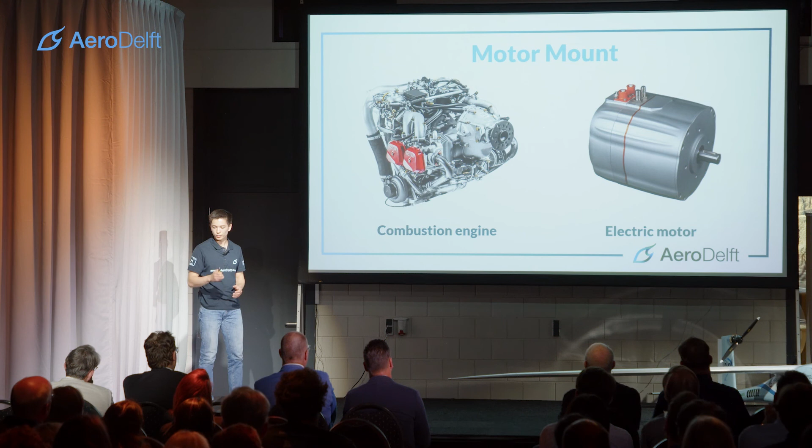To give an example, our electric motor is much shorter than the original combustion engine in the Sling 4. Given that the propeller is in a fixed position, we need a motor mount that extends way more to the front. Now, with our electric motor in position, we can add other components from the powertrain, such as the batteries and radiator, to end up with this final configuration.

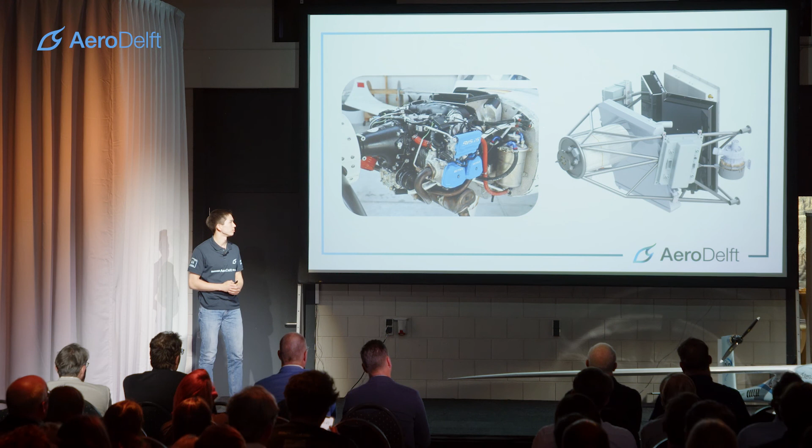Before we can make this motor mount, we have to get a better understanding of its strength by performing finite element analysis. Using special software, we can estimate the peak stresses and deflections that could occur during various flight cases, which we derive from the certification requirements. After countless iterations—which, if you ask Susanne, is an understatement—we judged this motor mount to be strong enough and ready for manufacturing.

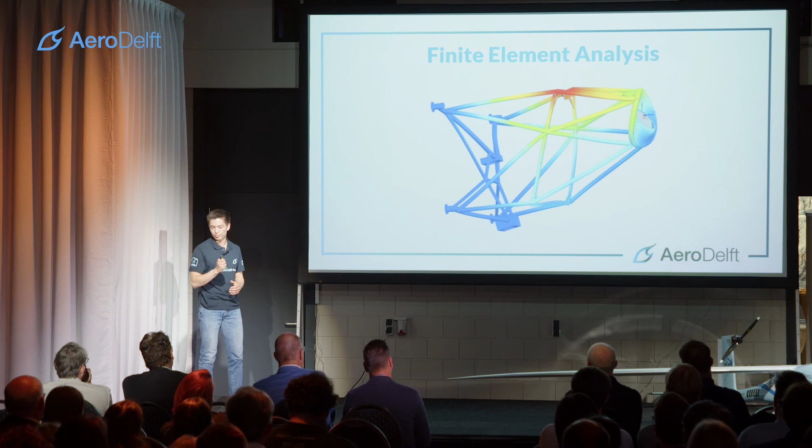So we chose a high-strength steel for our motor mount, and after we ordered the tubes, we had them cut to length and angle in a mill at the TU Delft. Then it was time to weld the tubes together to make our motor mount.

Now with our custom motor mount welded, it's time to install it on our aircraft. Making modifications like these can be scary sometimes, especially when a human life is at stake. Unfortunately, this responsibility holds even more when you want to build an aircraft. So now I'd like to take you on our journey of building a Sling 4.

Thanks to the efforts of last year's team, our kit arrived last August in the aircraft hall at the TU Delft. Our hands were itching to start the building process, but we had no clue how to start building. So we did some research, and concluded that we needed to organize three essential things before we could start building.

First, we needed a clean and organized workshop. Second, we needed to collect tools, such as rivet guns and drills, but also more exotic tools, such as a safety wire twister plier. And lastly, and maybe more importantly, we needed guidance and expertise to teach us the fine skills of building an aircraft. This we found in the Dutch Association for Amateur Aircraft Builders, or in Dutch the NVAV, and the technicians working at the aircraft hall, and later also the people from Vision Air who sponsor our project.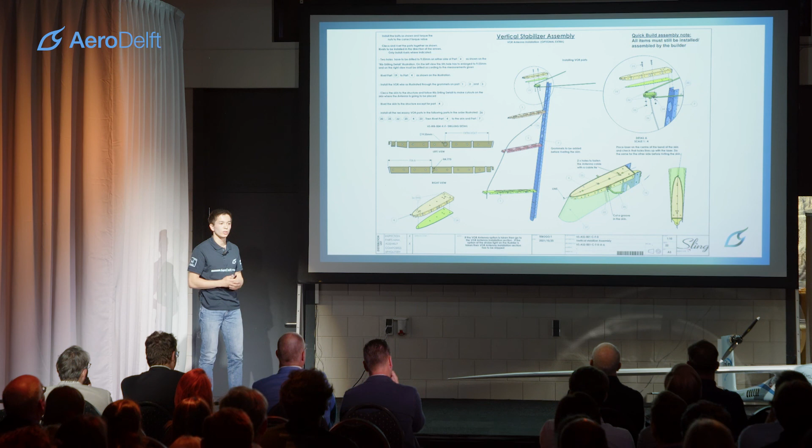Now, excited but cautious, we made a beginning on our very first of many assemblies, which was the tail. This is a relatively simple assembly, but it covers most of the standard practices you need during the entire building process. Building this assembly helped tremendously in gaining the necessary confidence to handle the aircraft parts, and within a few weeks we had actually finished our first aircraft parts.

At the beginning of the year we set a painting deadline in June, and knowing how much work still needed to be done to make that deadline, we could often be found working in the evenings or even on holidays, which took quite a heavy toll on the team, but we were really determined to make that painting deadline.

Fast forward to March, with the tail finished and the right wing also finished, we were putting the fuel tank on our left wing. With the experience from the right wing, we thought it would go smoothly again this time. But at this moment, we encountered probably the biggest setback of our year.

Our fuel tank would not fit on our left wing due to a production error in the main spar of our left wing. The main spar is basically the backbone of your wing, so we contacted the manufacturer and they gladly offered to send a completely new left wing to us.

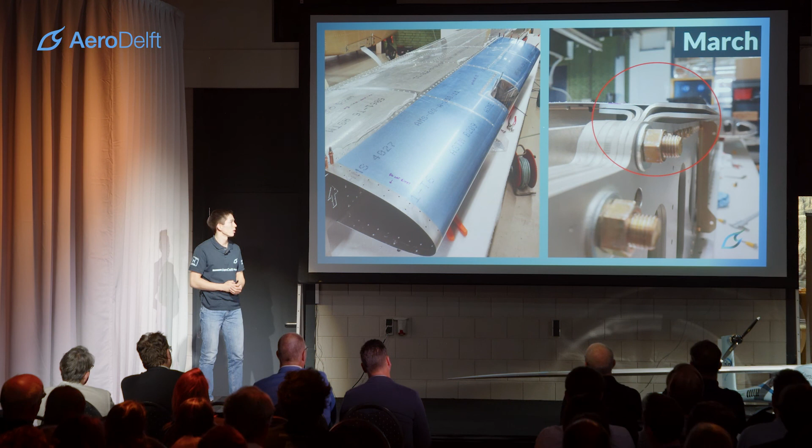This was a huge relief, but we had just spent the last 4 weeks building on a wing that is basically useless to our aircraft. We also didn't know if this new wing would even arrive on time for the painting deadline in June. But accepting the situation as it was, we decided this wing could maybe be used by future teams as a testbed for experimentation, for example putting batteries in a wing.

So we kept on going, and risking our own lives in the following months, we glued in the canopy, made the landing gear, and did some more work on the fuselage. It really started to look like an aircraft at this time.

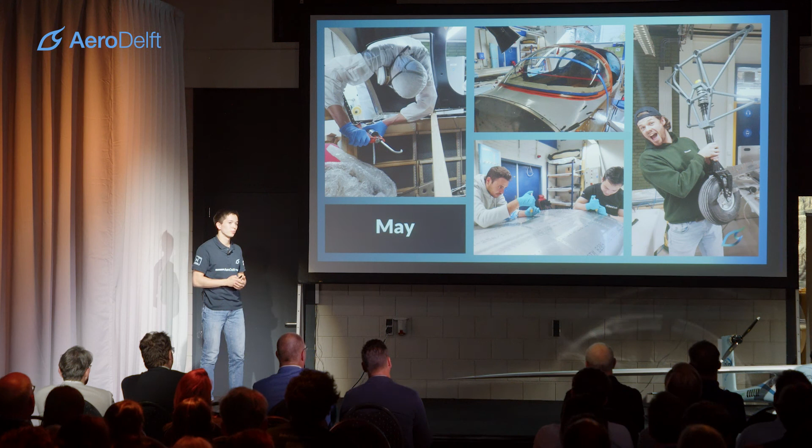On May 30th, it was time to transport our aircraft to the paint shop. This was quite a scary but exciting endeavor, but with the help of our friendly truck driver Frank, we managed to get the aircraft safely to the paint shop where we could spend the next 2 weeks painting it.

With the help of our teammates from other departments and the left wing arriving just in time, we managed to finish the job on the last day. This was also a huge moment of relief.

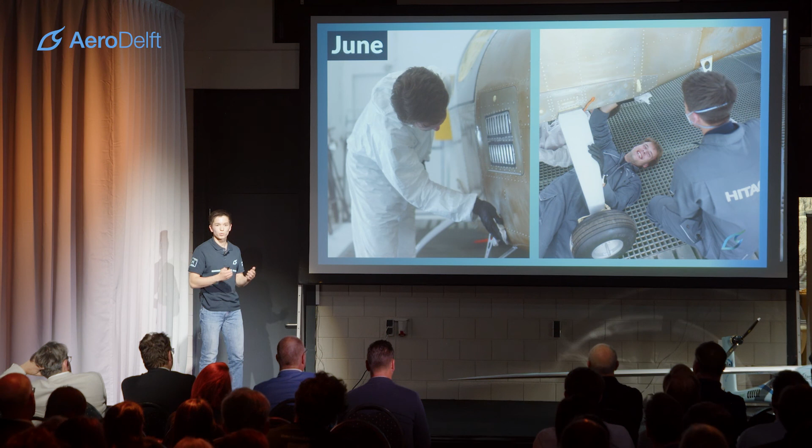After the weekend, we brought the aircraft back to Delft, where we spent the following 4 weeks, up until today, trying to finish the last things that needed to be done. It was a huge privilege for our team to have the opportunity to build an aircraft like this. We gained so much invaluable experience, and we made many happy memories together that are unforgettable.

So now I would like to end my presentation with 4 facts and figures that I think summarize our year of building a Sling.

We have broken at least 3 rivet guns. We have pulled more than 10,000 rivets. We have made 3 wings for a 2-wing aircraft. And we all found our new retirement hobby.

So now I would like to hand over the words to Rolf again, who will wrap up this presentation.

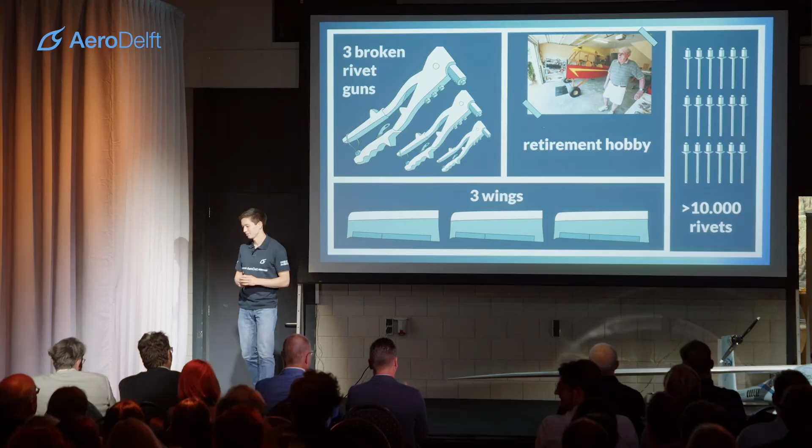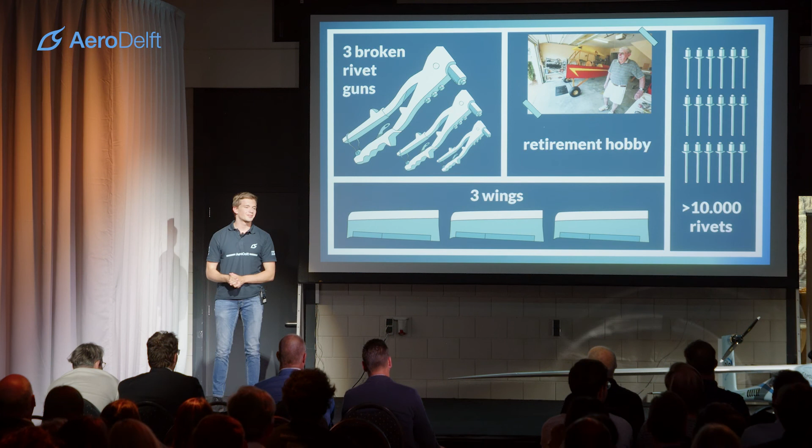Thank you, Ted. I think from the presentation you already got the impression, but it really was a busy year. We had a lot of ups and also a lot of downs. All in all, I think this year really serves as a nice example of how much you can accomplish when you work together as a team.